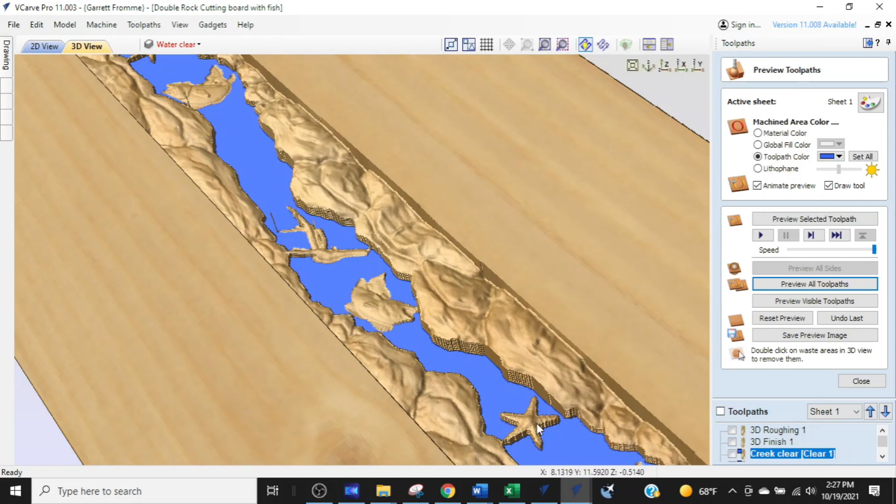You can see it is like a creek with fish in it. There's a couple of sticks, there's a starfish, and it's going through what looks like it's going to be the middle of a table. So he'll be doing a resin fill on this, I believe. It's kind of a cool project.

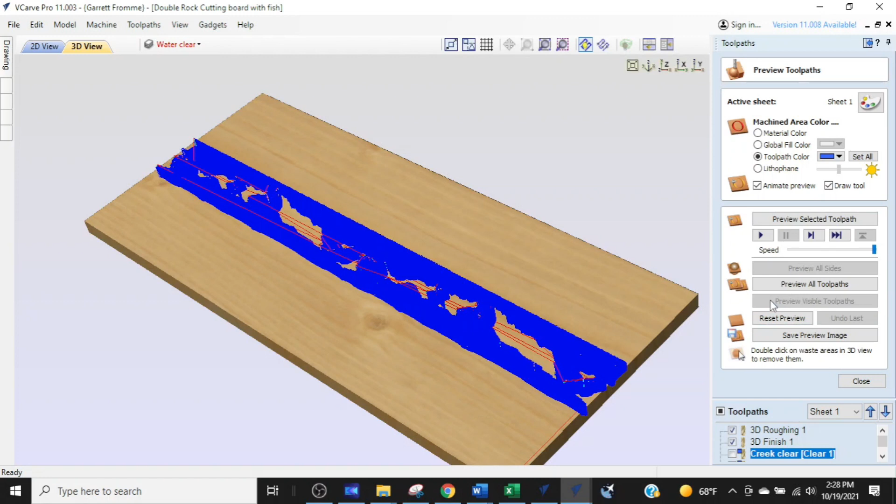But the problem that Mike is having is he doesn't know how to carve out this creek. Now I'll show you what I mean. I'm going to reset this preview and simply highlight the tool paths that Mike sees at this point, and this is what he has. So you can see that the creek itself is not carved out at this point, and he is wondering how to get to the point where he can carve out that creek.

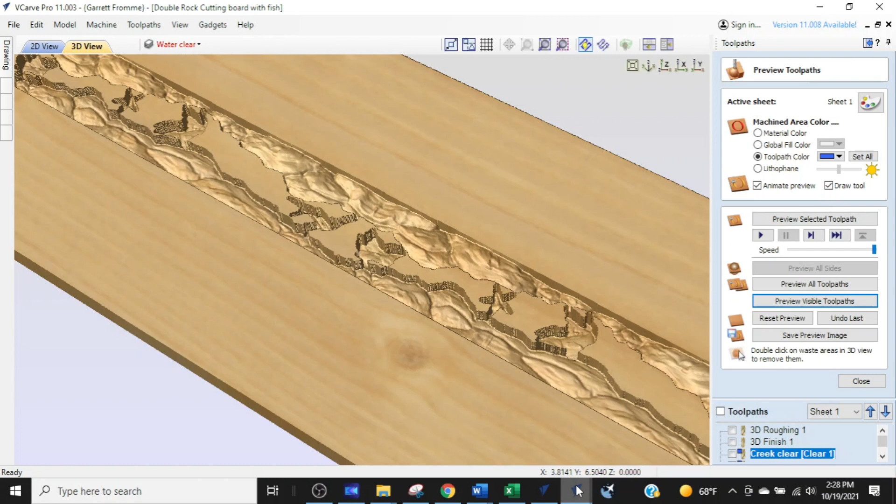So that's what we're going to work on, and I'm going to show you one technique to make this happen based on the project that Mike has, which is a fairly complex project to be working on. This is the beginning of the project here.

Now what he has done is he has placed several 3D models in this. So he has this creek bank there, a creek bank here. It looks like he's got 4 creek banks on each side. So this is kind of cool what he's got.

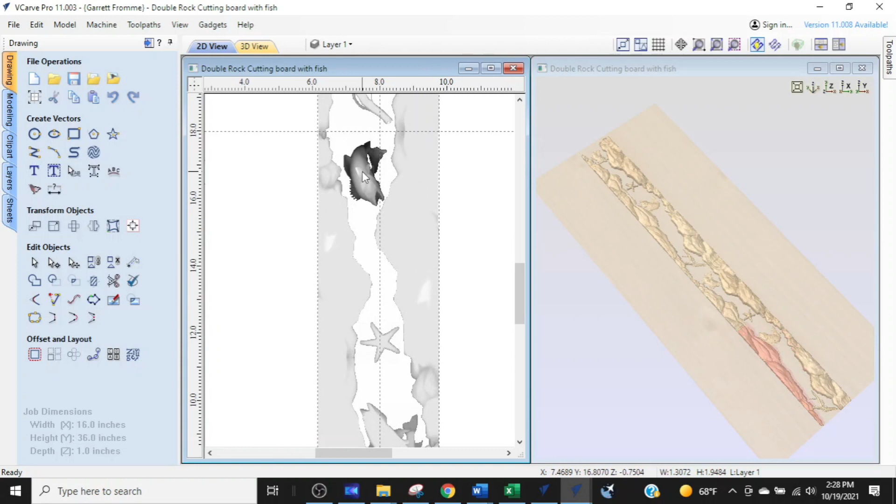And then he's got the 3D models of the fish inside and the starfish right there. You can see on our 3D screen what he has. I'll just switch over to the 3D real quick and zoom it up, and you can see he's got all those models in there. Let's just get that rotated right for you.

And so now he needs to get rid of the creek, and that's where he's struggling at. So we're going to walk through this whole process right here.

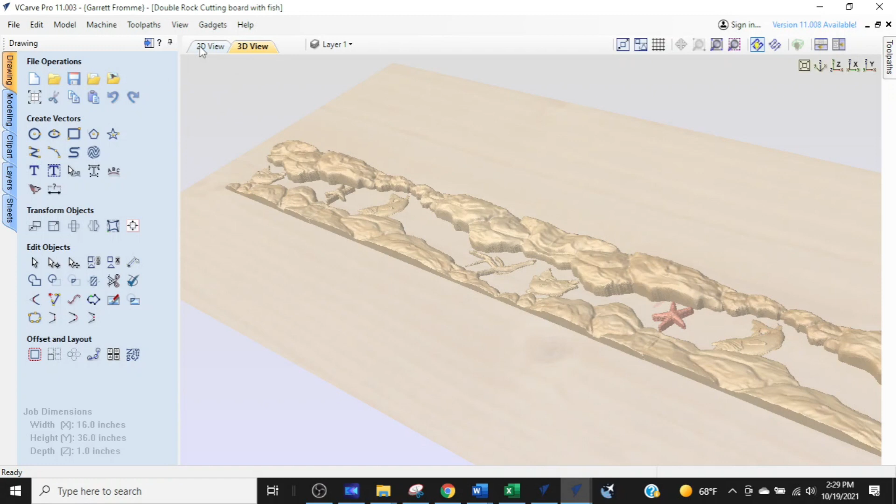So I'm going to switch over to the 2D view, and what we're looking at right now are some construction lines that Mike has created. If you don't know how these construction lines are created, it's very easy.

All you have to do is come up to the scale bar up on the top or on the side, and while you're there you simply just click your left mouse button and drag a line down, and now we've created one. So you can do a lot with this. I will do another video on these things.

So the first thing I want to do is create some layers to work with. Layers are like different sheets of paper, so I can work with individual items as desired. So we're going to create some layers.

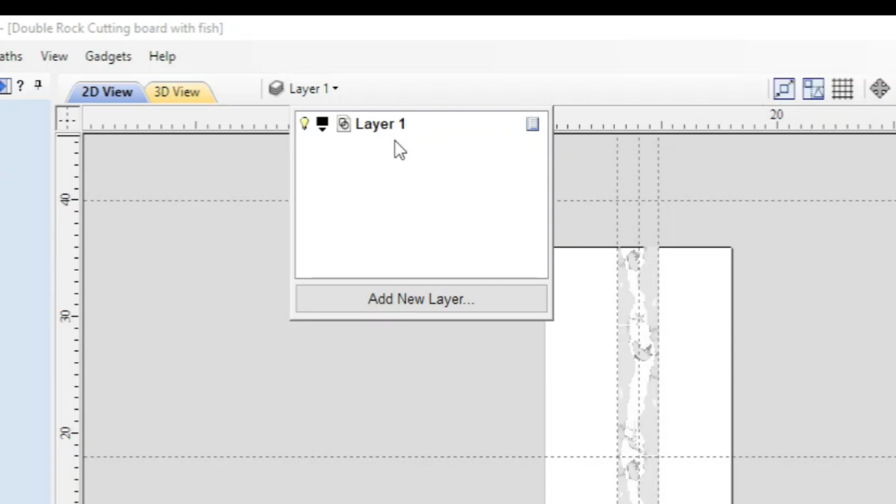So right here is the layers, and we're going to click that blue bar, and we have one layer. One of the things that we already know is that we have 3D components in this drawing, so I'm going to make a layer dedicated to those 3D components. I am going to select the word layer 1 by clicking on it once, and it turns blue so I can edit it, and I'm simply going to call it 3D components.

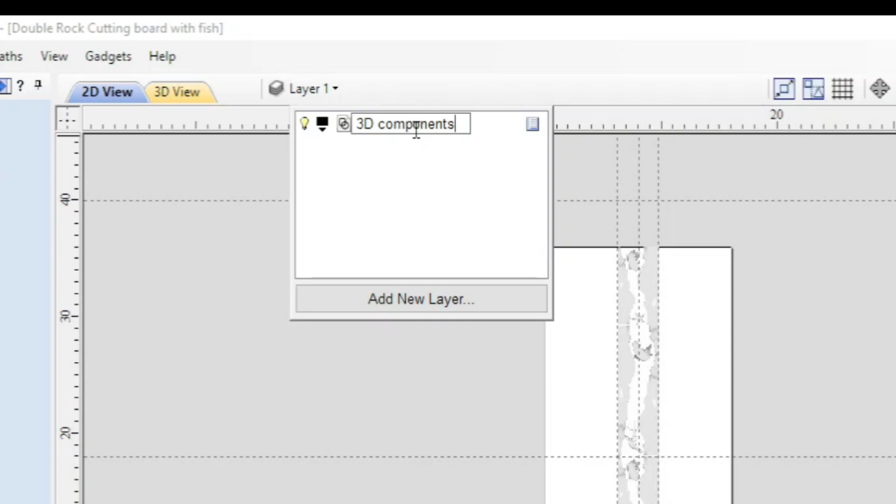And then I'll just click over in the white space. I'm going to click in the drop down box, and now we have named that 3D components, and you can see up here 3D components is listed.

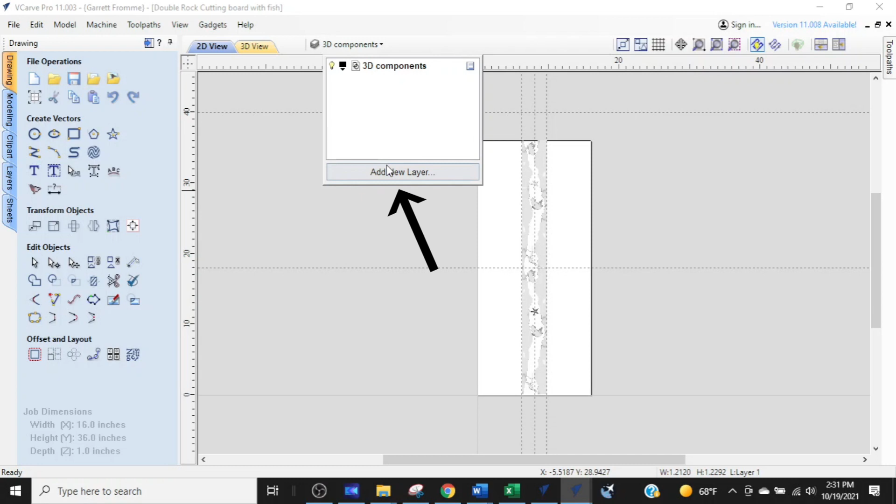So now we want to make boundaries around all these 3D components, and so we're going to create a layer to help us with that. What we do is come down and add new layer. Now you're going to understand why I'm doing this in just a little bit. But I'm going to click add new layer, and now you see there's another layer added here.

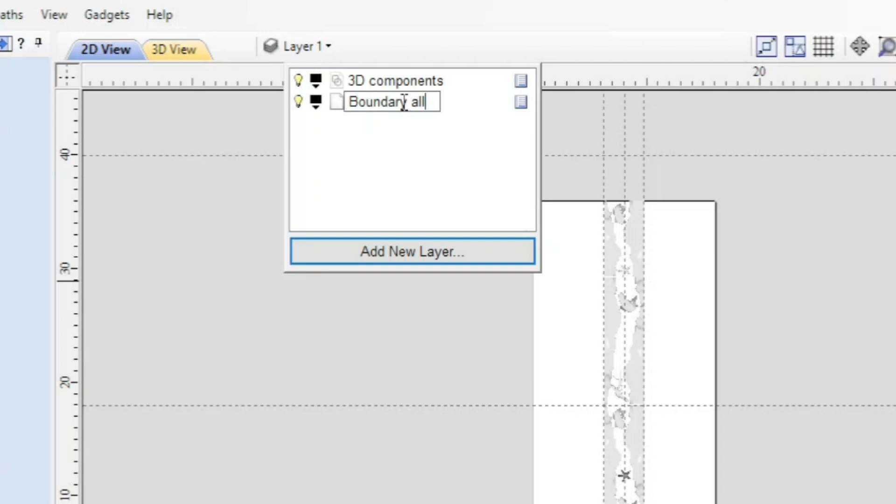So we're going to call this boundary. We're going to call it boundary, B-O-U-N-D-A-R-Y, all. And I'm just simply going to click right in here to engage that name, and now you can see it's there.

So now we want to identify the creek itself. So we're going to create a new layer for the creek, and we're going to add a new layer, click it, and now we have another layer, and we're going to call this Creek Clear, or we can call it Clearwater. That's a good name, Creek Clear.

Okay, I'm going to click right here, and we are going to click the black box right next to it, because I'm going to change the color of the lines that are going to be created. So I'm going to click that and click a color that I want. I'm going to click red, and we are good to go.

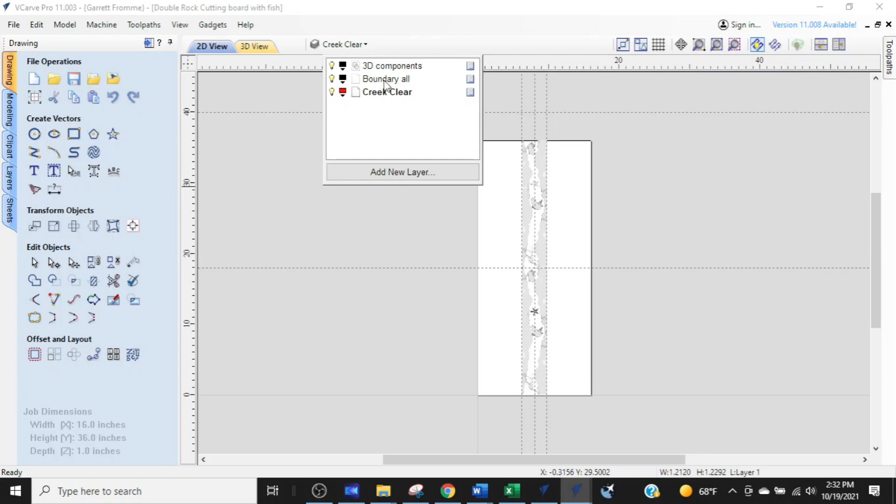So first of all, we want to get to the boundary layer, the boundary all layer, because we want to create a boundary around all our 3D models.

We are on boundary all. It says it right up here. So that's our confirmation that we were on that layer.

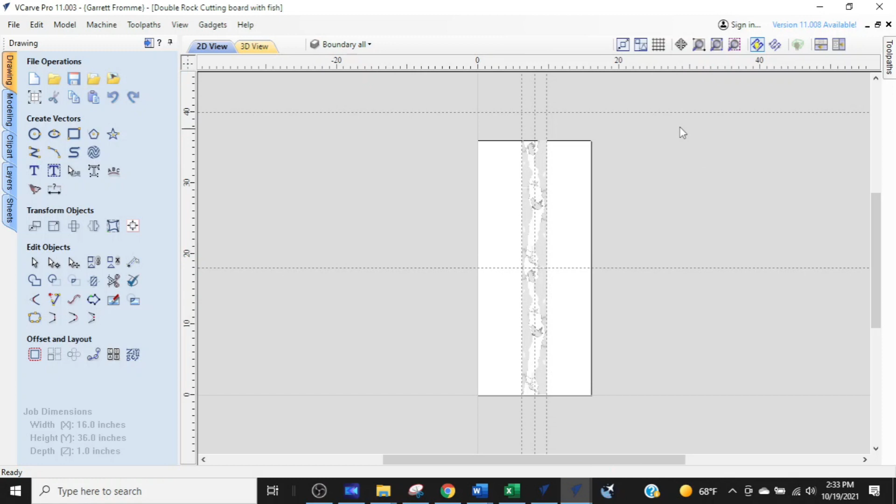And so now what we're going to do is come over to any corner above and away from our project. We're just going to go from the upper left to the lower right, and we're going to create a box that's going to encompass the entire 3D model, just like that. And you can see everything in the 3D model is now highlighted. Okay, so now we're going to create a boundary around that model.

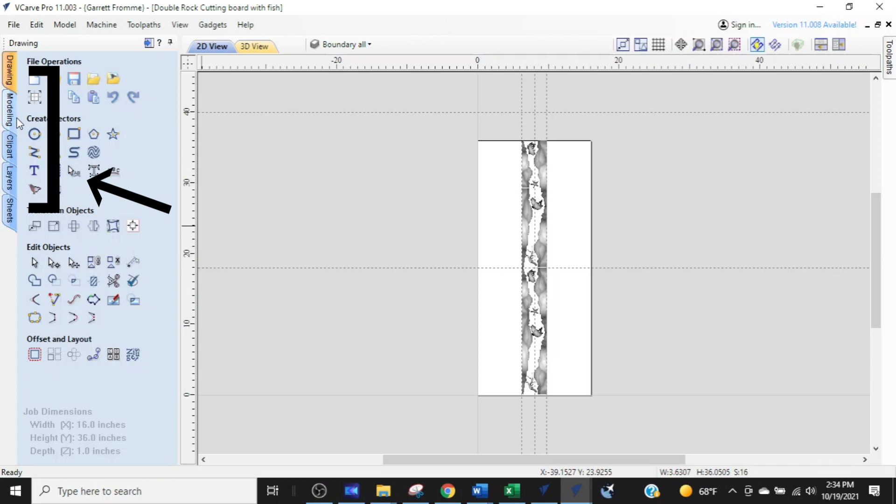Now if you have less than version 11 in the Vectric software, you're going to have some blue tabs down at the bottom on the left side. If you have version 11, the tabs are over here on the left and the upper side along the side panel. What you want to do is go to those tabs, and we're going to go to the modeling tab.

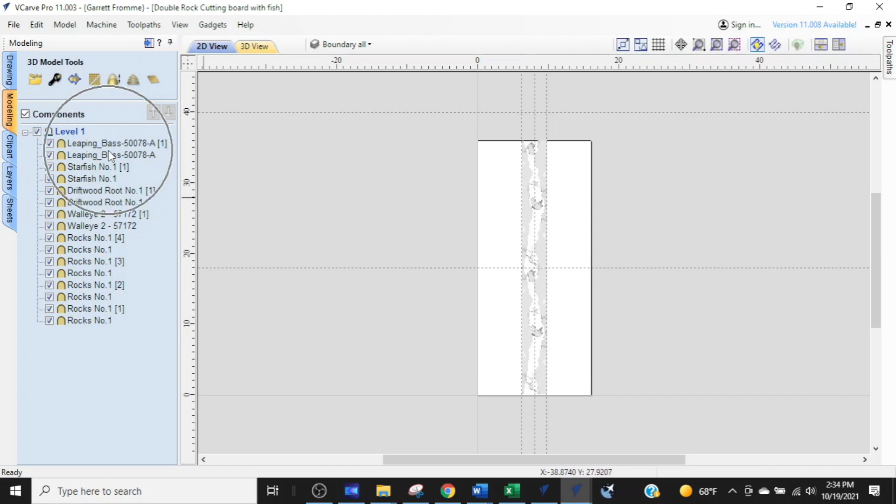We're going to select that, and the first thing is you're going to see all these items in your list, and we want to make sure that they are all highlighted a dark blue. When we created that window around it and selected everything, that's what we have. We got the highlighted dark blue. I'll show you. I'm just simply going to click right here, and it unhighlighted those, and you can see they're no longer highlighted. So we're going to create that window around everything again and grab it, and now everything's dark blue.

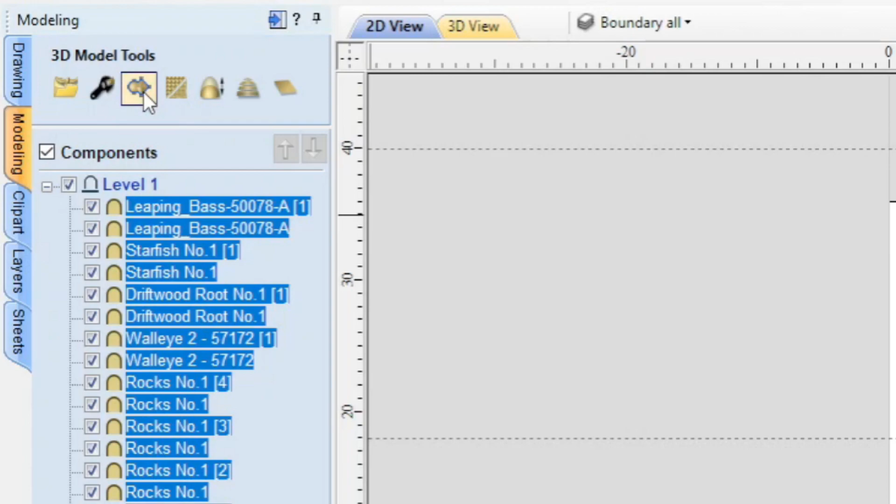So what you want to do is find an icon that says create vector boundary around selected components, and so this is the icon that we're going to use. And all we have to do is click it once, and we're done. So now we just click out here in the field, and I'm going to show you what that just did.

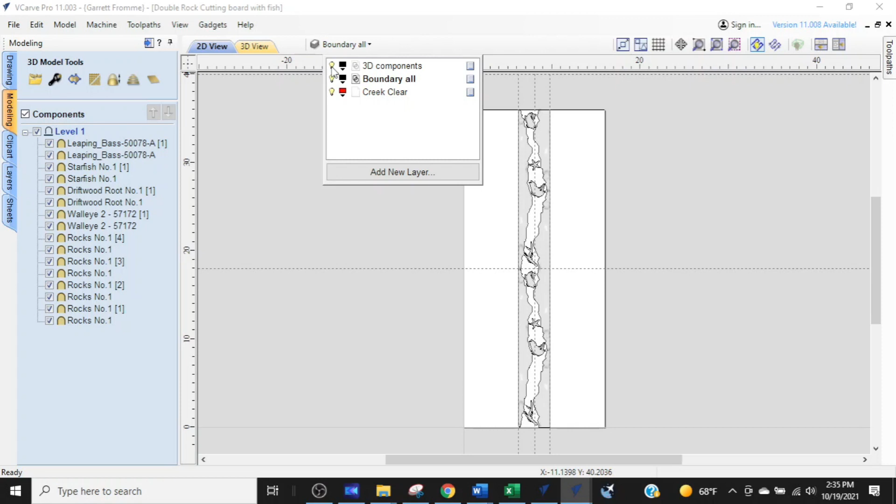We'll go up to the layers section right here in the blue box, click it, and we're going to hit the little light bulb next to 3D components. And what that's going to do is make the 3D components all invisible. So I click that, and now you see we have some lines here. That's what we just created by clicking that button, create vector boundary around selected objects.

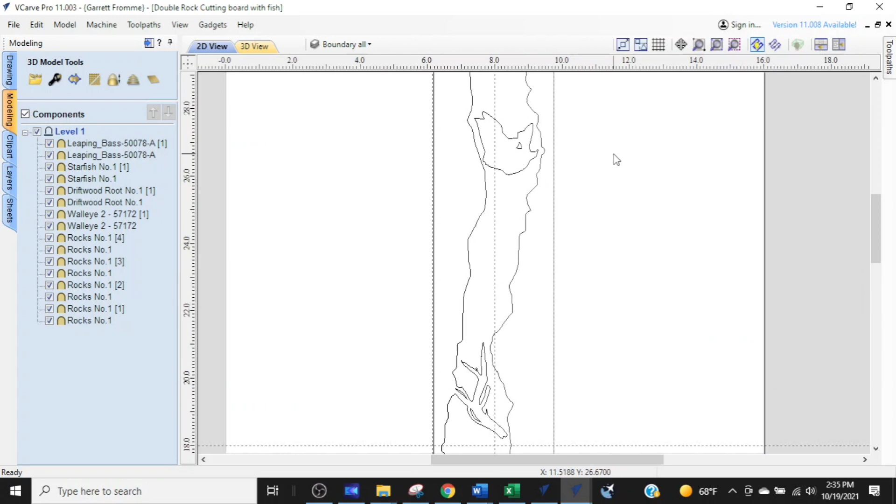All the items are selected, and by clicking that button, we created boundaries around all the 3D models that were there. So you can see there's the fish and the starfish and the sticks and the bank of the creek.

So we are good to go so far, but now, well, we don't need to use this boundary in order to carve this 3D model, but we're going to take advantage of the boundary we just created so we can carve out the creek. We want to get rid of all the material inside the creek here, but we don't want to touch the fish or the stick or the starfish. So what we're going to do is change layers now and create some new vectors on a new layer that's going to outline the creek itself.

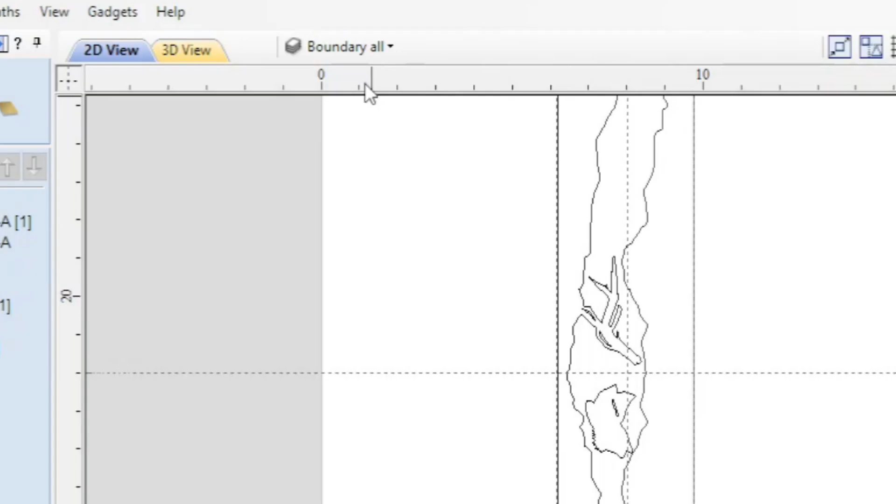So we come up to layers, click it again, and we're going to come down and select creek clear. You select that and you see it says creek clear up here. And that means we're on the layer that we want to be on. So now we're going to just click out in the white space to get rid of this menu box. So you click there and that menu box goes away.

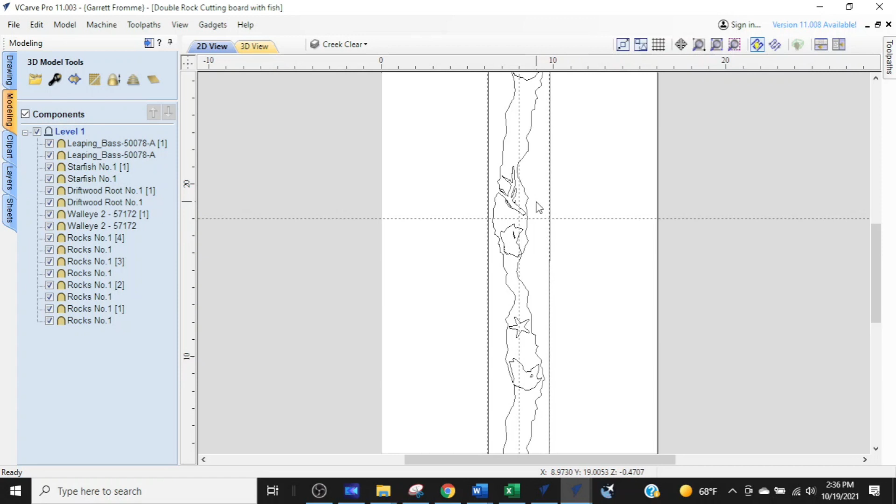And what we're going to do is we're going to copy all these vectors over to this new layer. Right now they are on boundary all layer. If I go and turn the little light bulb off on boundary all, they go away. So that's my confirmation that it's on that layer. But we have nothing on creek clear layer. So we're going to copy everything over to creek clear layer.

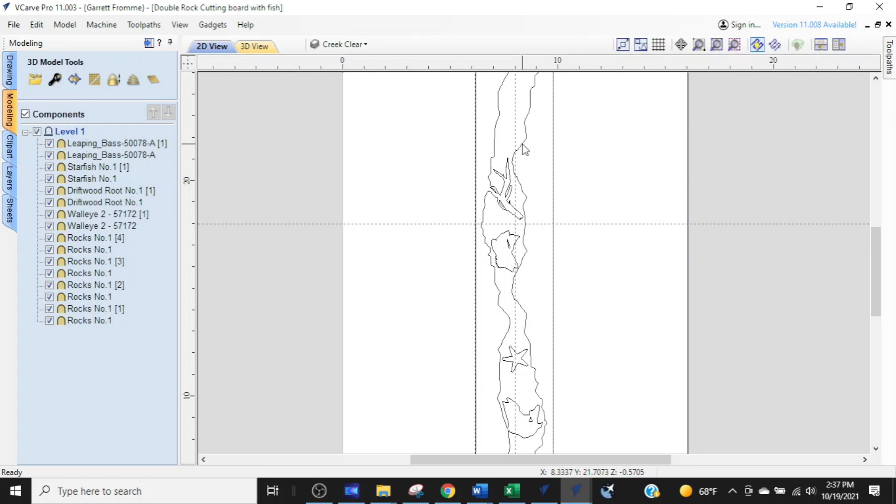So we're going to click one of these vectors and you notice everything turned solid purple. That means that all the vectors that we created are grouped. If it came out as dashed, then they are not grouped and you would have to select every item in there in order to do this copy. But it's a good thing that it's grouped. We want that. It makes it much easier.

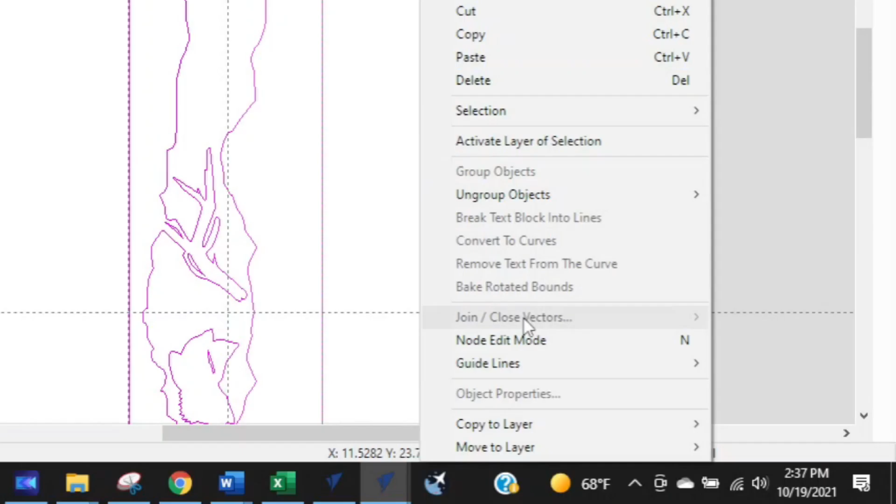And so while everything is selected pink or purple, anywhere on the screen, we're going to right click and we're going to get a menu up. And we're going to come down to the bottom and go to copy to layer. And we're going to click creek clear. And what that's going to do is copy everything that's selected over to creek clear. It will not remove it from the original layer it's on. It's just simply going to copy it.

So I click that. And so now you can see all the lines turned red. If you remember, we turned creek clear red color right here. So that means we now have it on there. But the thing is, it's still on the boundary layer as black. The creek clear copy is sitting on top of the black line. So we don't want to mess with that right now.

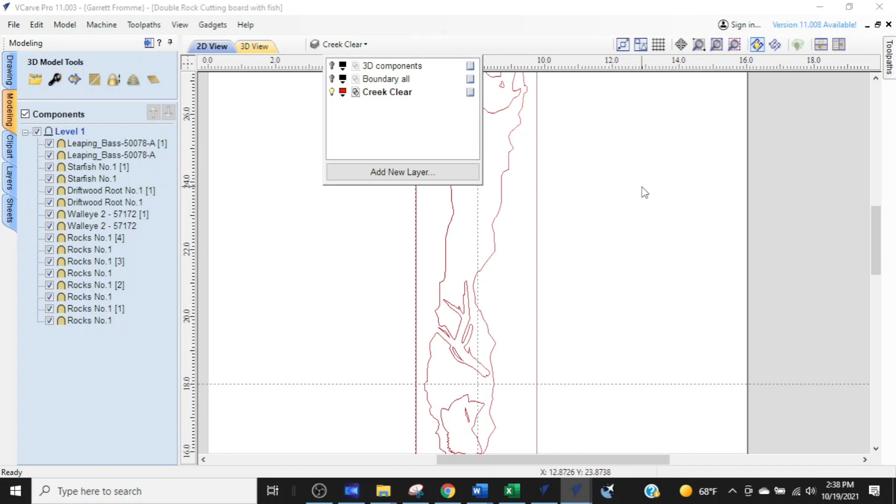So what we're going to do is come over and just click the little light bulb next to boundary all. We're going to turn that off. We want it out of our way and we don't want to fiddle with it. And so now we're simply going to click out here into space to close this menu, and at the same time it'll deselect anything that might have been selected, which is what we want. So now we are on the creek clear layer, and that's the only layer turned on.

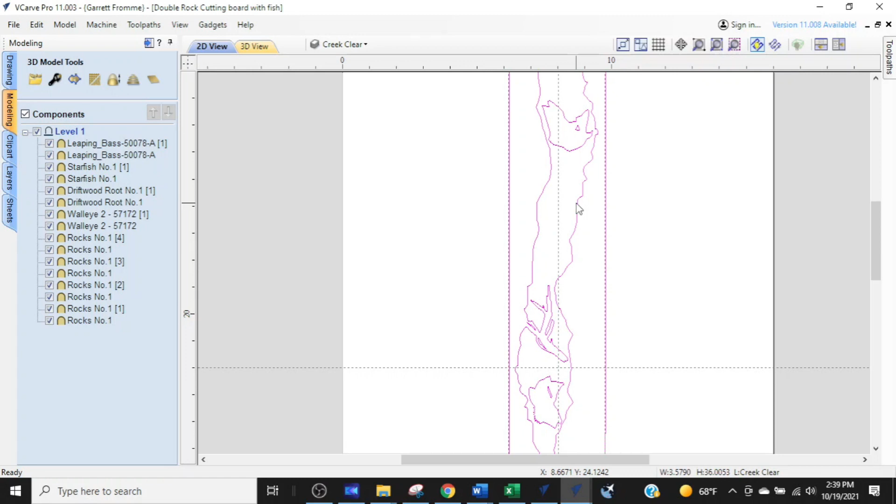And now we need to ungroup all these vectors because now we have to isolate the creek. So we're going to select that vector, and again, everything's grouped because it came in solid purple. I'm going to ungroup it. With everything selected, I can go anywhere on the screen, right click again, and you'll see down in the middle of the menu it says ungroup objects. So when you hover over that, a new menu appears next to it. One says ungroup back onto original object layers, and the other one says ungroup onto groups layer.

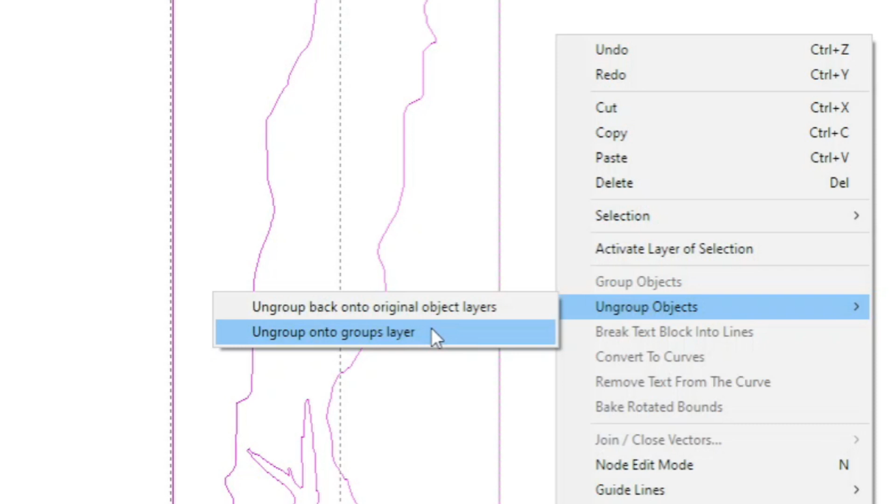If you select this button here, the first one, it's going to ungroup it, but it's going to copy it back over to the first layer that we were working with, which was boundary all. So you want to select the second one, ungroup onto groups layer. Now I don't know why they say onto groups layer. It doesn't make sense to me, but that's what we want. And we click it and you can see everything is now dashed. That means it's all ungrouped.

And that means if I select an item like the fish, only the fish is going to be highlighted, or the creek, a part of the creek will be highlighted. But that's exactly what we wanted. So now we are going to isolate this creek. So we're going to come up to the top of the creek right here. And I'm simply going to click right here for right now because I want to deselect this part of the creek. So I click there.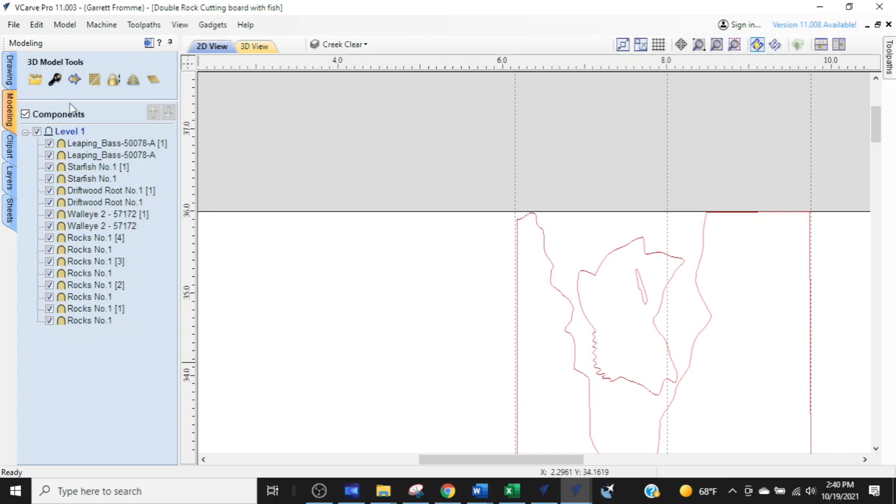We're going to go back over to these little blue tabs we have over in the drawing area. Remember, if you have less than version 10 in the Vectric software, your tabs will be down here. If you have version 11, they will be up here along the left side. And we're going to go to the drawing tab. Click that. Now you want to make sure that your snap buttons are turned on. That's this button and this button. They're turned on when they have a little box around them. I'll show you what I mean.

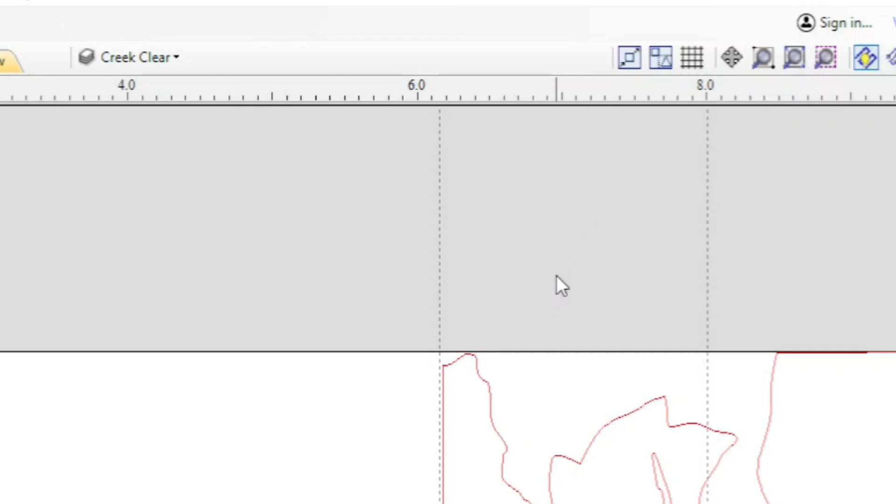I'm going to click that one snap button and you see that box around it went away. So we want it turned on. And the reason is because we're going to draw some lines and we want the lines to grab to the lines that we are going to be selecting. You'll see what I mean in a minute.

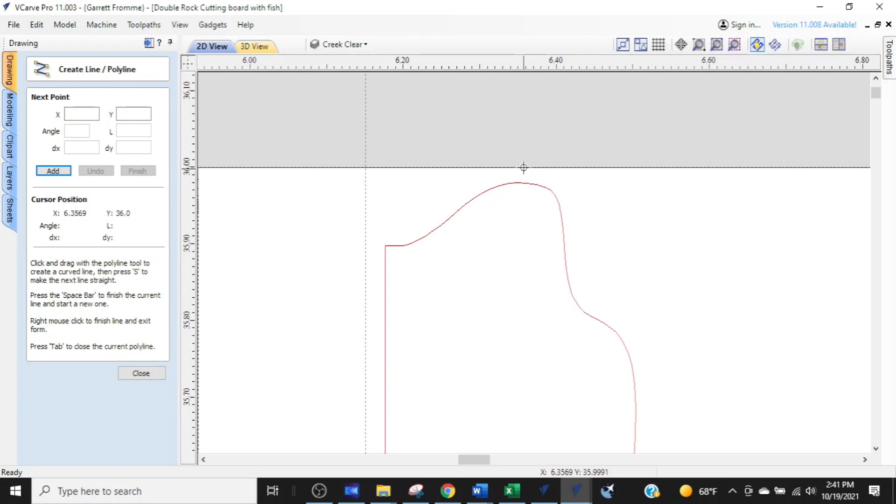So what we're going to do is grab a straight line right here, the polyline, and select that. And we're going to zoom in to the end of the creek. Now, Mike, just so you know, your creek is not going all the way to the end of the table. I don't think it's going to make a difference here, but you just may want to pay attention to that and maybe stretch this out a little bit. I'll show you how to do that real quick.

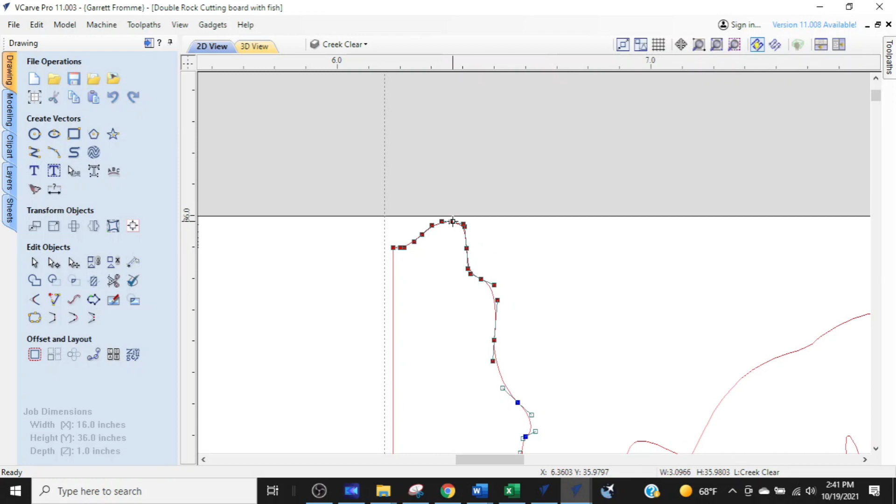We're going to select that. And so we just have that part of the creek, and we're going to hit N for node, and I'm going to create a window right there. We'll come all the way around those nodes there. And while that's selected, we're just going to grab one of these nodes and just stretch it upwards. And now we have crossed over. So that's one way you can fix that.

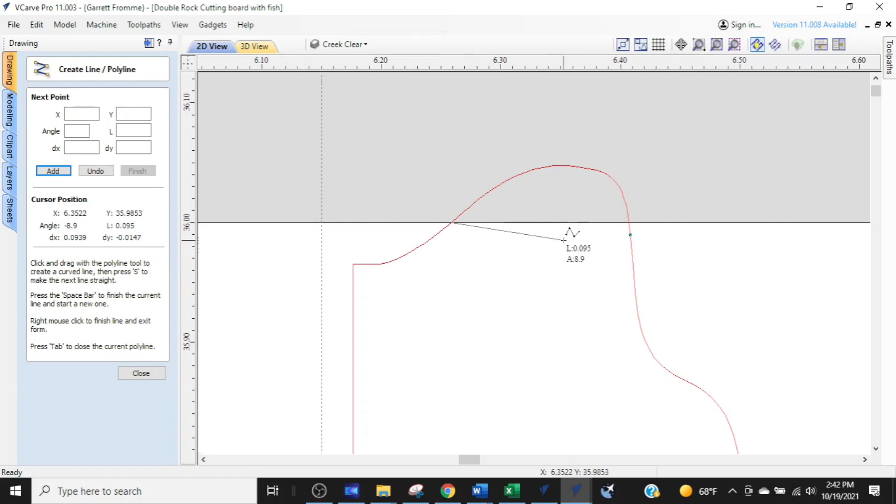And then we would go back to our line. Hit the escape button to get out of node mode. We're going to come back to our line, and we're going to just create a line from this intersection point right there. And the snaps are turned on, so we can do exactly what we did. You see the line snapped right to the intersection of the end of the project and where this curved line crosses over. And we're simply going to come over and we're going to find this corner right there.

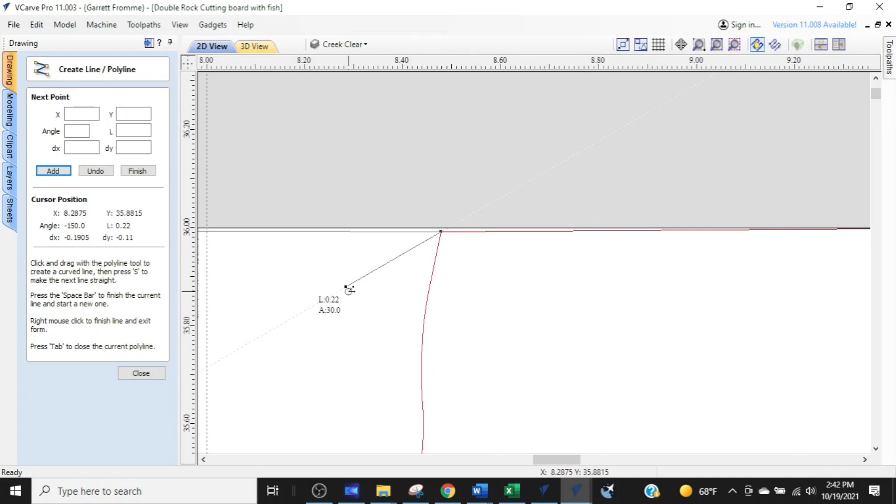Now, again, you want to fix this part as well, Mike, but I'm not going to do that in this. I just want to show you how to get to carving out in the middle of 3D projects. So I click that, and now we have that line going all the way across. Now you see I still have a line going, and I don't want to continue to draw that line. So I'm going to hit the space bar, and what that's going to do is terminate that line, but I am still in line mode. You can tell by my cursor it has a zigzag on it. That means we are in drawing straight lines. So we can start a new line.

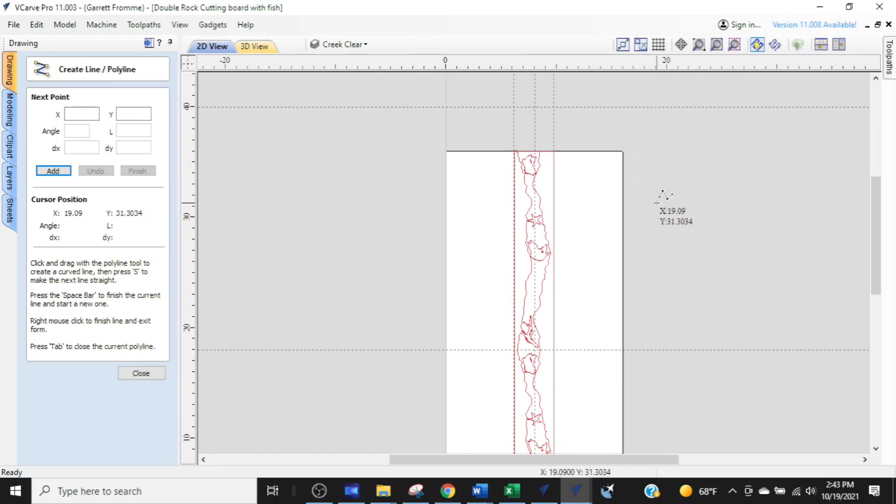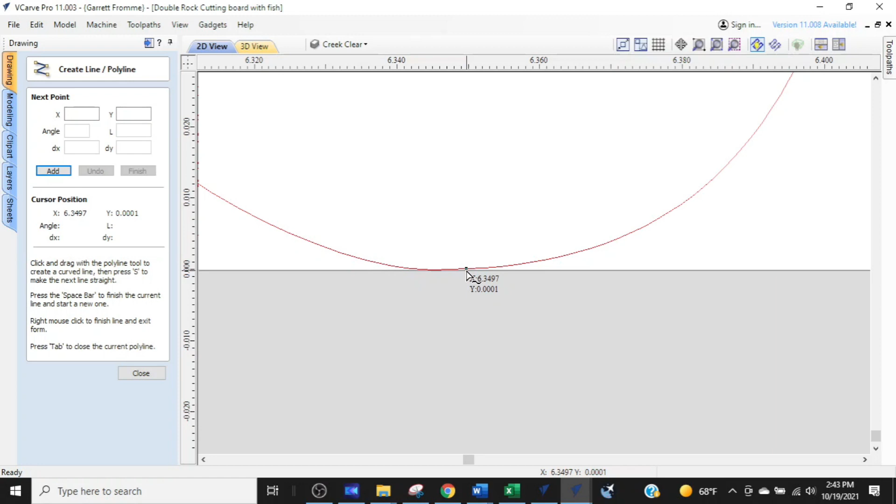So we're going to go to the other end of this drawing and do the same thing. We're going to find a point that's at the bottom and to the right just a little bit. And the reason I'm doing this is because I don't want my line to cross over a very thin area right there. It's going to cause some issue when we're trying to carve things out. So we're going to select a little bit over and to the right, and I grab that, and we're going to come over to the other side. We've got that little corner there, and we're going to let it snap right there. And then we're going to hit space. We're good. I'm going to hit escape to get out of line mode.

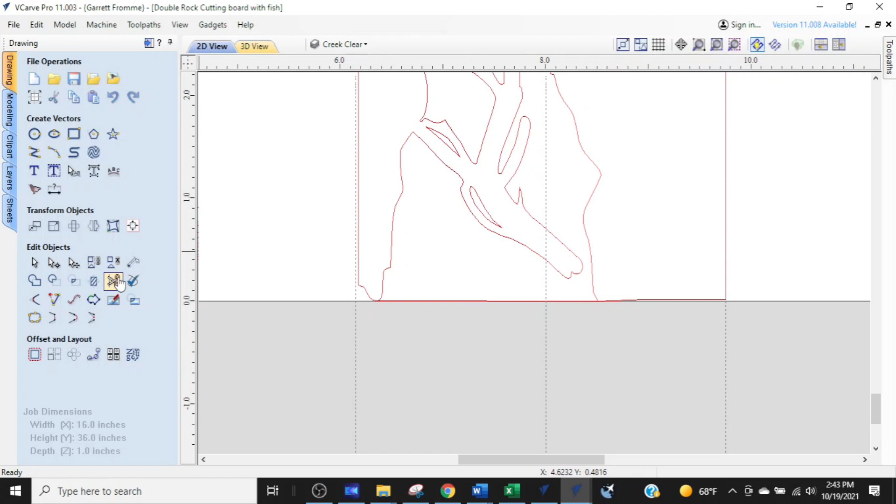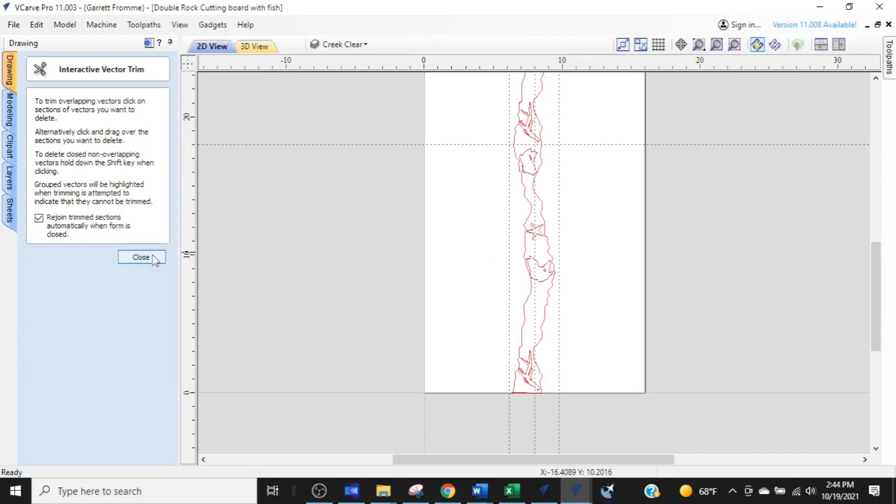So I'm going to close the cutting. I'm going to switch over to the tool path, and we're just going to take a look at what we've got right now. So this little button here, it says preview tool paths. I'm going to select it, and I'm going to simply preview all tool paths to see what we have so far. And so you remember we have all the carves.

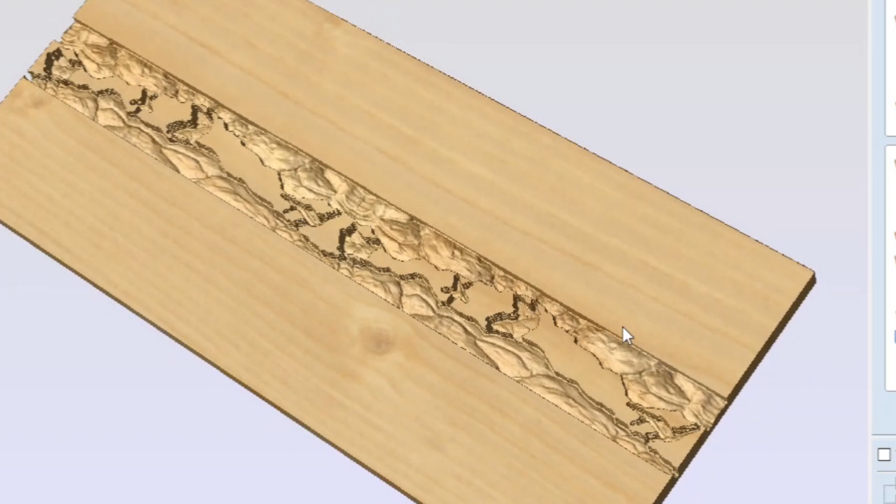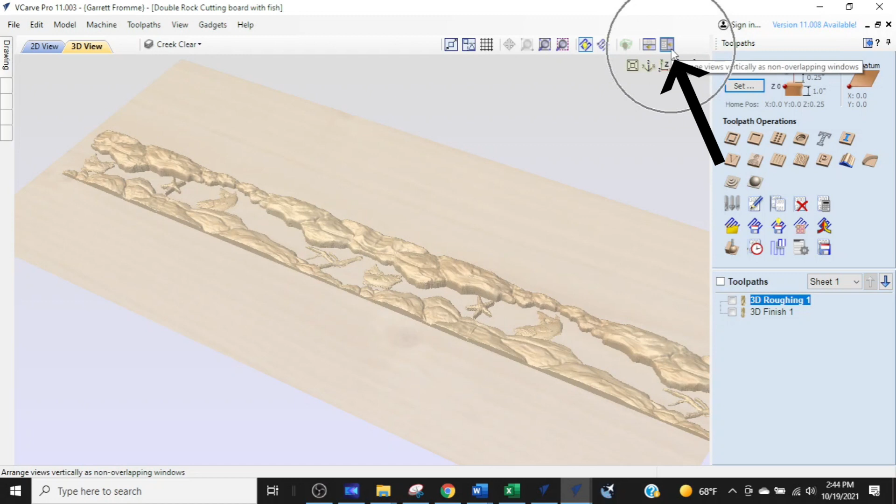We have the starfish buried down in the wood. We have a fish buried down in the wood. We have the banks buried in the wood, but the creek is up way high. So this is exactly what we're going to fix right now. So I'm going to close this preview toolpaths menu, and we're going to split our screen by hitting this little button right up here in the upper rightish area. It's that little square split in the middle button.

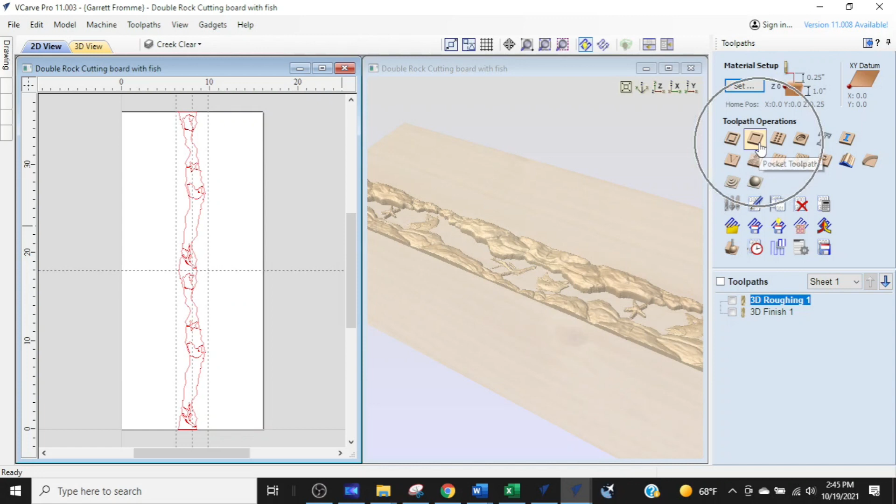Click that. And so what we want to do is pocket out everything around in the water. So we just simply are taking the water level down to where it should be. So we are going to click the pocketing toolpath right here, and that will clear out material inside of boundaries that we create, which is what we've created over here in the 2D area. We've created creek boundaries. So I select that button, and I think this project is an inch thick.

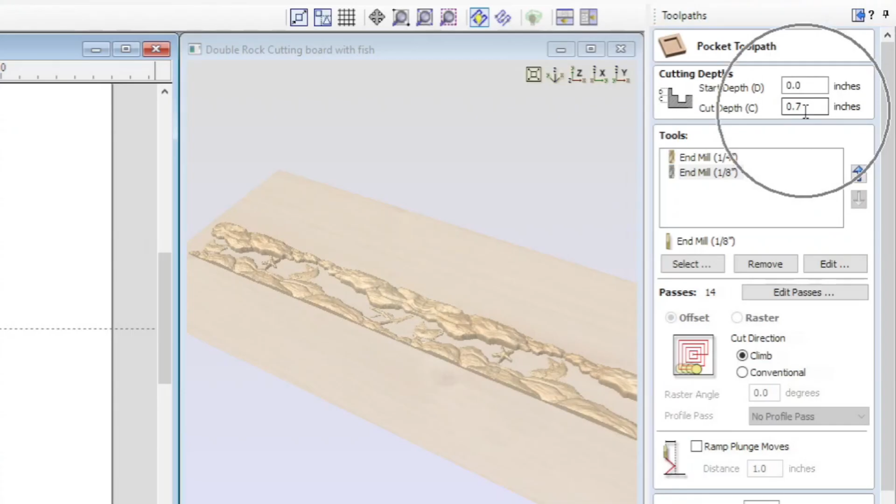So what we're going to do, first of all, we click the pocketing, and then we have to select our boundaries. So we're going to select everything in the 2D view. So it's all highlighted pink, and that's what we have. And then we are going to select the depth of cut. So I was practicing a little bit on this before and found that depth of cut is about 0.7 to get the water level down to where it's going to go. So I've set it up at 0.7,

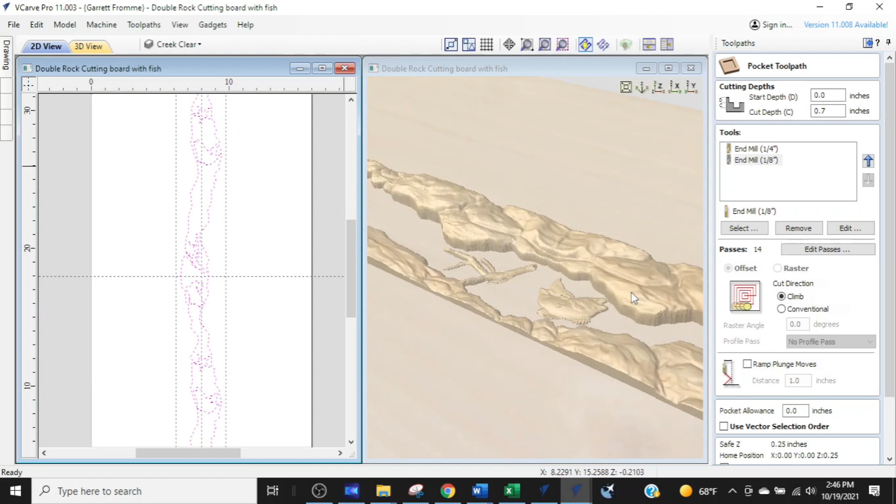and then we need to select the clearance bits that we're going to be using. I know that this has got some pretty funny tight shapes in here. We need to get into the corners right up in here, and a 1/4 inch end mill will not get in there. So we have to use a smaller bit, but we also want to use a big bit in order to get as much of this taken out as fast as possible. So we're selecting 2 bits. Where it says tools, we have the 1/4 inch end mill and the 1/8 inch end mill.

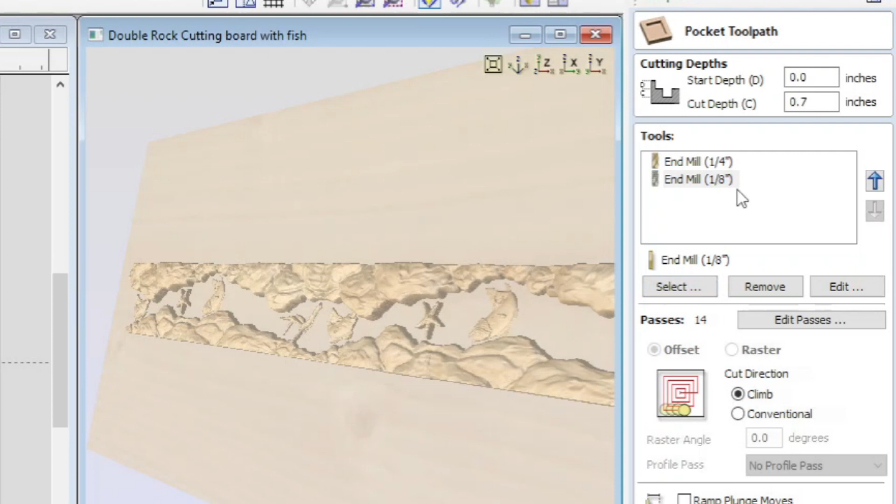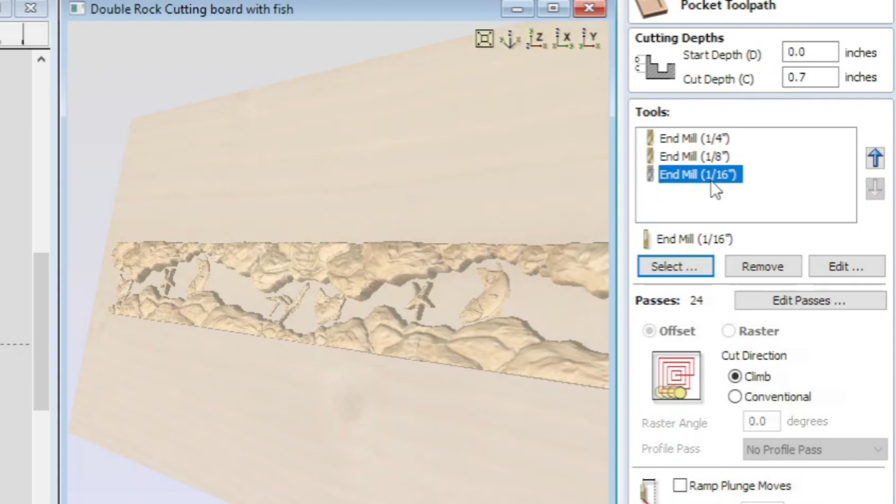Now if you need to select those bits, all you do is keep selecting bits. So I'll show you. We'll just pick a 1/16 real quick. I'm going to hit select, and I'm just going to select the 1/16 inch end mill, and there you can see it's been added to this list. So if you need to get some finer cleanup going on, then that's the way you do it. And if your bits are out of order, then you use the arrow buttons over here to get them in order. You should always want this to go from biggest to smallest. So I'm going to select that and click the remove button because I don't want it. And then we are going to just see.

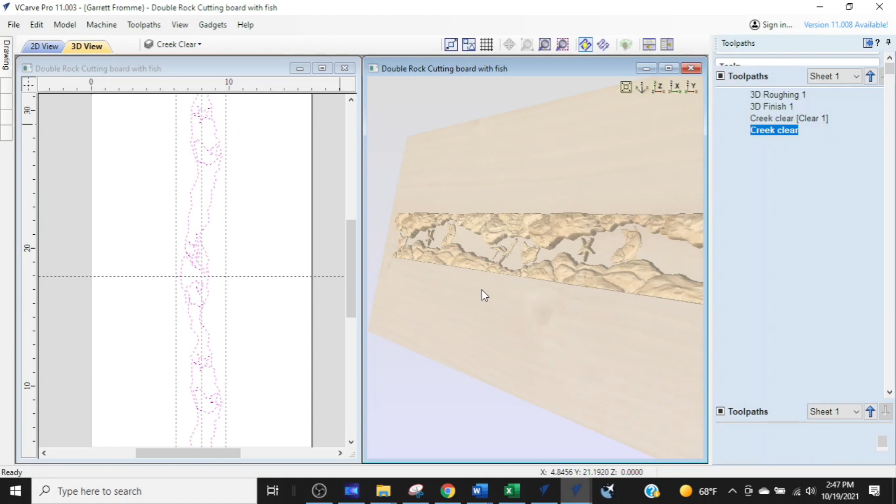Okay, so I am set on offset. I'm not going to discuss that here because I've talked about that in other videos. This is just to show you the creek thing. We're going to name our tool path. We're going to call it Creek Clear. And we're going to calculate. So I have to go to Vector Validator. And I'm going to continue anyway because I want to see what it's creating. Vector Validator means that we have an issue in there, and it's going to ignore some things if it has to. But it looks like we're in pretty good shape.

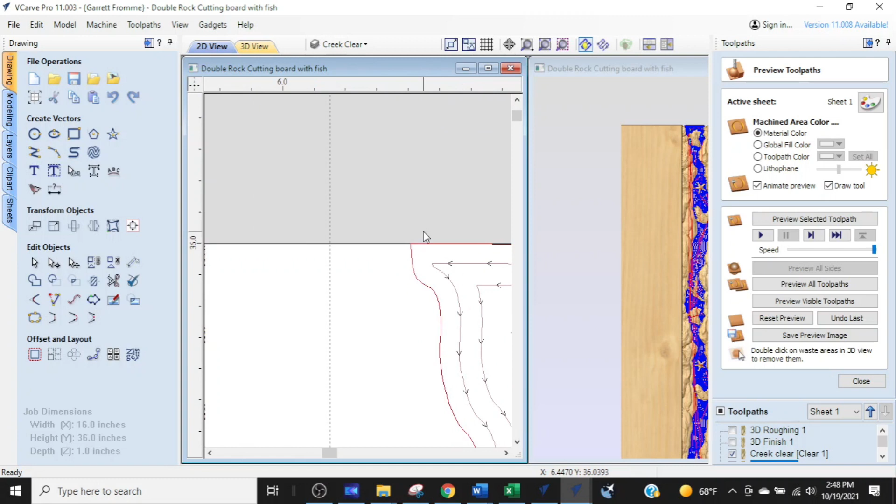So with Vector Validator, I know exactly what went wrong. Okay. It would be right here. I've got this little weird spot right there. So what we're going to do is simply fix that real quick. You know we got this little pull-out tab that brings out the menu. So this is for quick fixes. I'm going to grab the scissors. I'm going to come in and I'm simply going to cut that away and close that. And then we are going to go back into that tool path.

Creek Clear. Either one, there's 2 of them because we've got the 1/4 inch bit right there and the 1/8 inch bit right there, but you can click either one, it'll take you into the same tool path. And I just want to make sure that creek is still selected, which it's not now because we modified that line. So hold your shift button down and select the creek outline. And there it is. I'm going to recalculate this, and we will not get that warning this time.

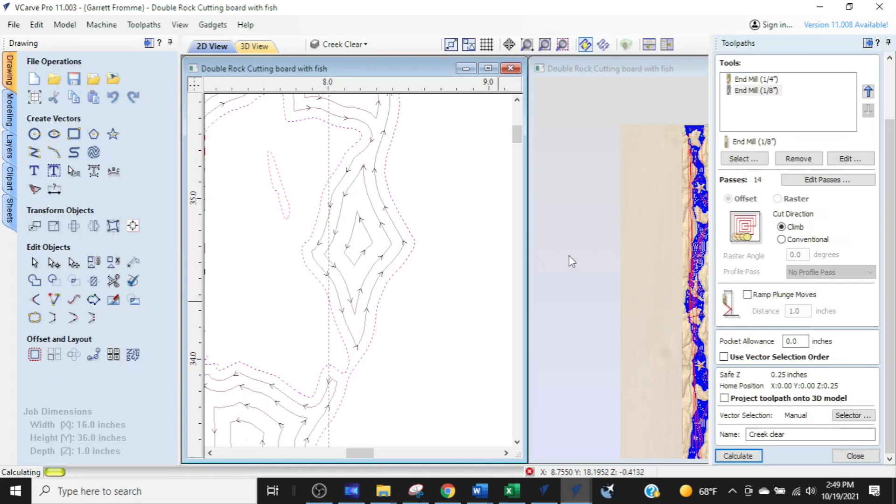And we are good to go. Now see how the menu is still hanging out up here? I don't want that, so I'm going to click the blue button to get rid of it, and we are going to reset that tool path, and now everything is good to go. Now we're going to preview all tool paths, but let's get this big first so we can see it all.

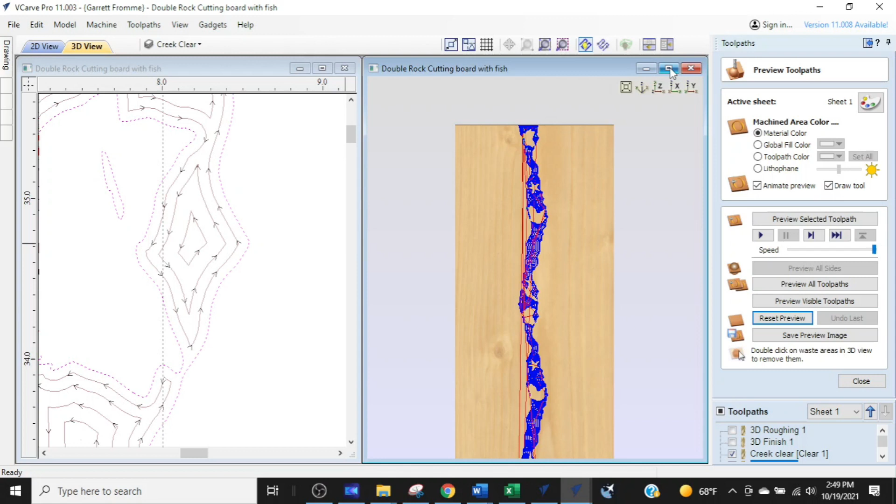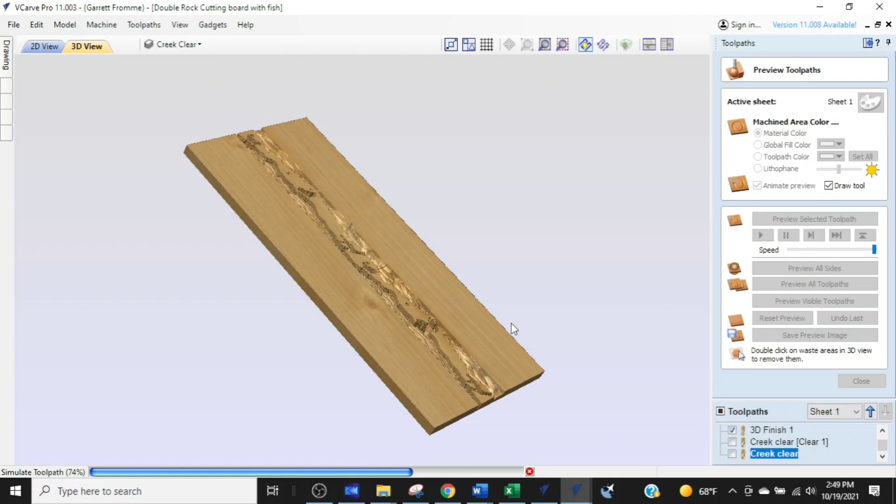When we reset the tool path, it takes away all the carve that we would have had there. I'll show you what I mean. I'm just going to clear this out real quick. You see, it just takes us back to that board. Now I'm going to preview all tool paths. That's going to run all the tool paths we have created there. So I select that, and you can see the bit is now starting to run out. And now we have cleared out the creek.

Now you see our banks are a little bit high here, right in this area. So you might have to modify and do a little tilting on the 3D models. I can talk about that in another video, or you can go to Mike Mazelik's channel. He does a lot of advanced 3D modeling stuff. Very, very, very good with the Vectric Aspire. So we're looking good there.

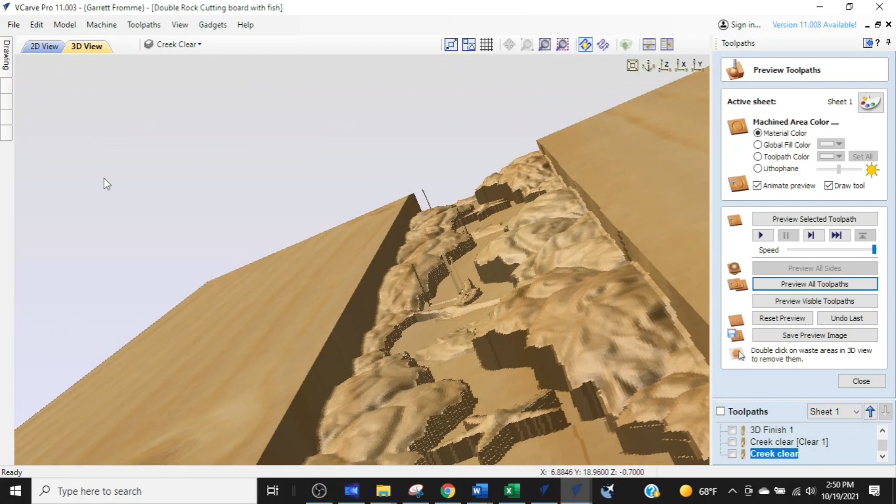You can see I've got a couple of pieces sticking up here. That's because I would need a finer bit, like a 16th, to get into there. But 16ths aren't long enough to get into this depth. So we could possibly make this creek a little bit shallower, but if we do, we will start to come up high on the fishes and what have you. So my resolution is set a little low on this, I think.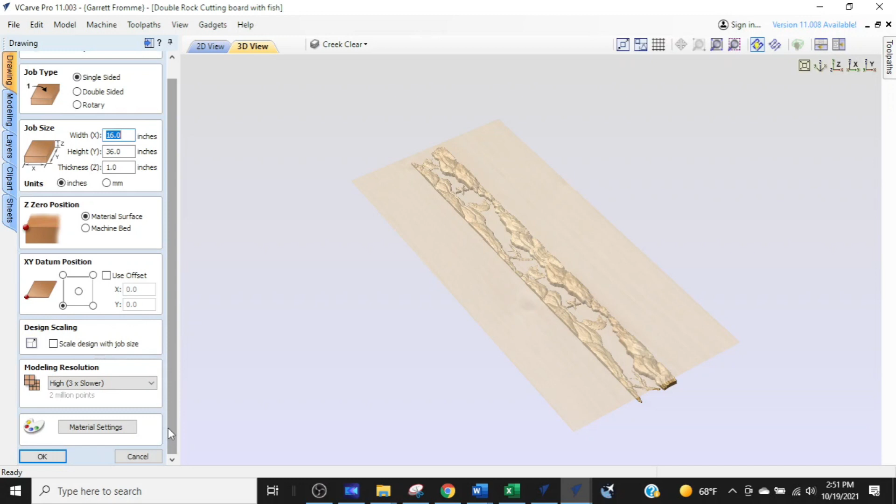I'm going to close this, and I'm going to switch back over to here, and I'm going to go to Job Setup right there, because I want to see what my resolution is set up on. So we've got the resolution set on high. In this case, we'd probably want to go very high. So I'm going to change it. I'm going to select OK. Let the computer do its stuff. I'm going to switch back over to Toolpath. I'm going to recalculate everything by clicking the little calculator button there.

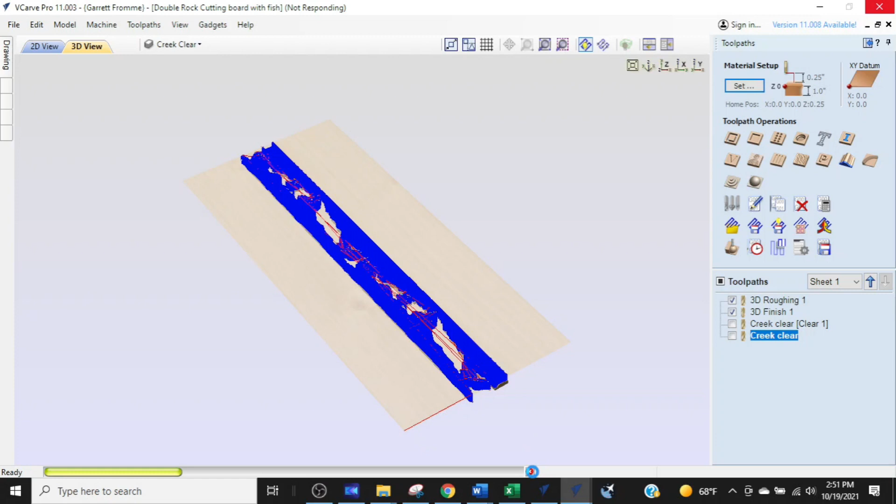Now my computer resolution won't make this show up really good, but you can see now it's taking a little longer to calculate this thing out. Let's see. There we go. Okay. So it's just taking a little bit longer because I'm using a lot higher resolution. And let's see what she looks like. We're going to reset the preview, and we're going to run all toolpaths. And I mean, it doesn't make stuff look a lot better. It's just the resolution of my computer.

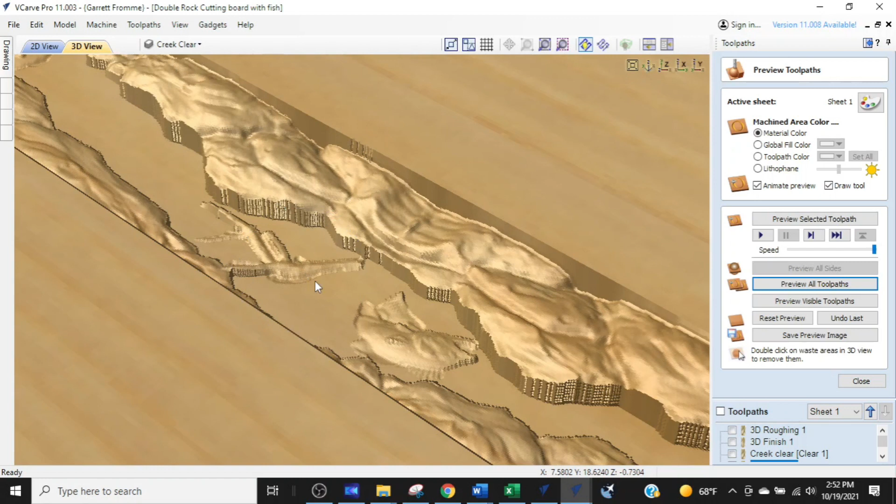It's looking like you might need to raise the base height up on your fishes and things like that, Mike, a little bit. I've got other videos. I'll put links down for the rooster video that I think talks about it. I have another video that will talk about it as well. So the links will be down below to teach you more about the 3D models and how to work with them. Okay, so let's just kind of doctor this up so you see exactly what we have completed.

I'm going to go to Toolpath Color.

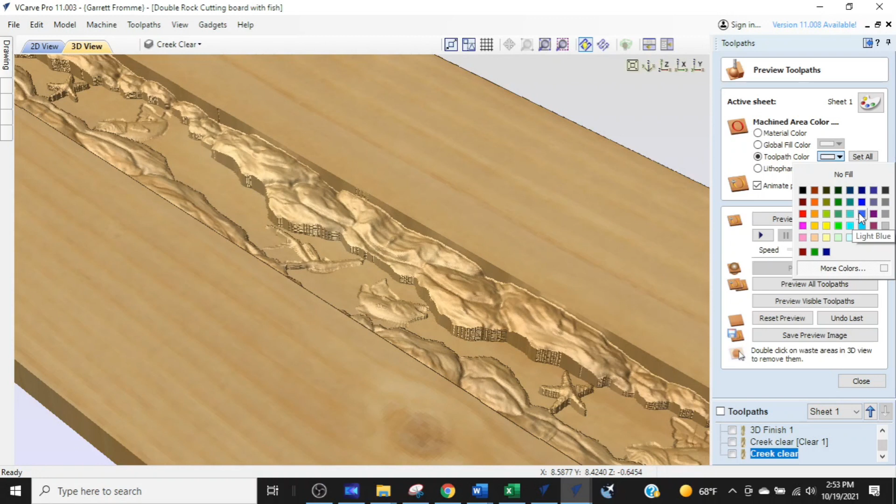Okay, so let's change the color. We're going to turn the creek into a blue creek. So I'm going to select Toolpath Color. And I want to make sure down in the toolpath area that one of the creek things is selected. So we have creek clear selected in the bottom. We're going to select a nice bluish color, a nice light, pretty blue. We'll take that one right there. Now you see I gained some color in my toolpath.

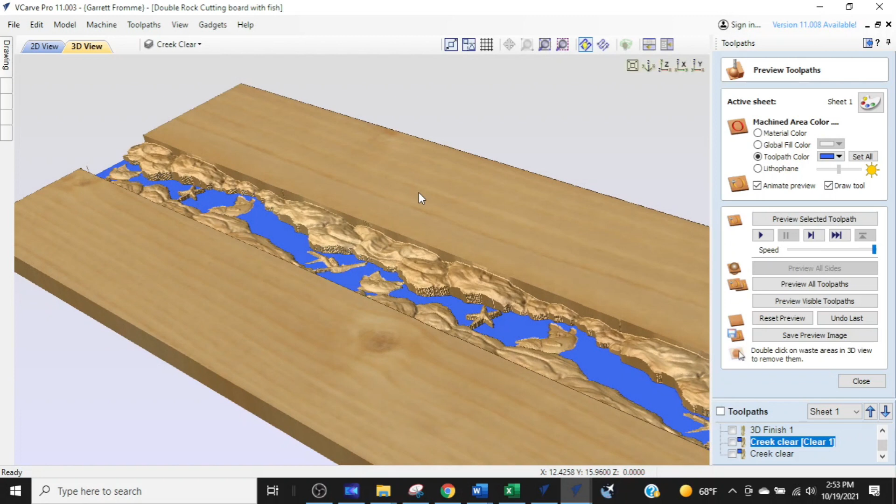Now that's the finishing tool, the finishing bit. That's the 1/8 bit. We still have to change the 1/4 inch bit. So I got to come over here and select that 1/4 inch path, and come up here and change the color for that as well. So I'm going to select the same blue, and look at that. We got a beautiful creek running through this thing. So that's what Mike is going to be doing when he's done with this. You still got a bit of work to do on this, Mike. You're really going to some advanced stuff here.

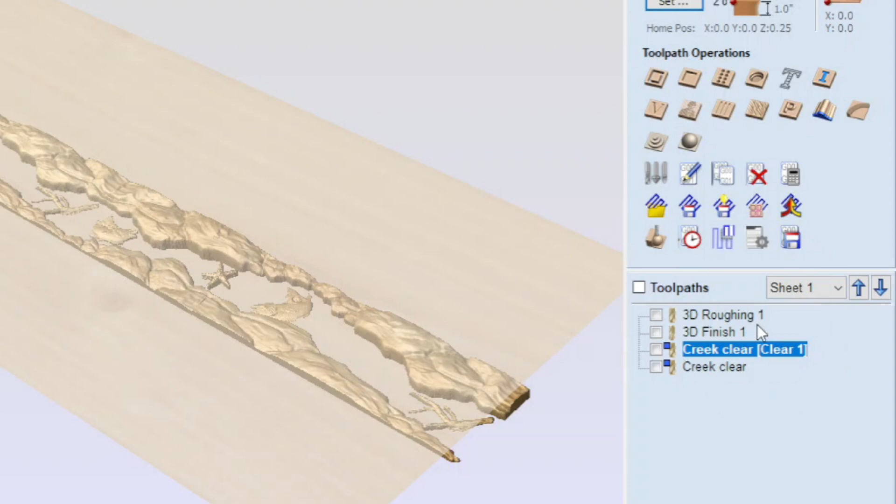Before I go into that, these two toolpaths up on top, we're going to check them—these are your 3D toolpaths. We're going to click into one of these, and we've clicked into the top one, and you can see this is the 1/4 inch end mill as well. So we want to make this optimal, running everything with the 1/4 inch first and then working down to our smaller bits.

So I'm going to close this, and what I'm going to do is select the creek clear 1, and use this little arrow right here to move it up. Matter of fact, I'll probably move it up to the top, so it'll clear out the creek first, and then it'll come in and clear out the 3D roughing, and then we have the finishing 1/8 ball nose.

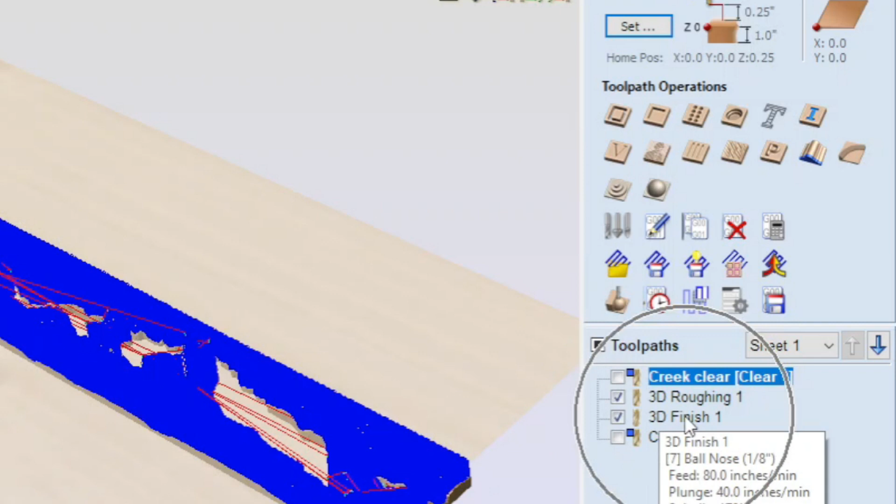I'm going to double click into that, and you can see right here it says ball nose 1/8, and then we have the 1/8 flat bottom bit right there.

So here you see I'm guessing—this is why when I normally name my toolpaths, I always put the bit in the name. For example, the creek clear, which is the 1/8 flat bottom bit, I'm going to right click that, rename it, and come to the end and type in 1/8EM, so I know it's the 1/8 flat bottom end mill.

So I'll just click that, and now we have the name here. The 3D finish, we'll rename that to 1/8 BN. Now I don't use slashes or hyphens or anything like that, because when it writes the G code for this, it's going to change those figures to underscores—it will not use periods or slashes.

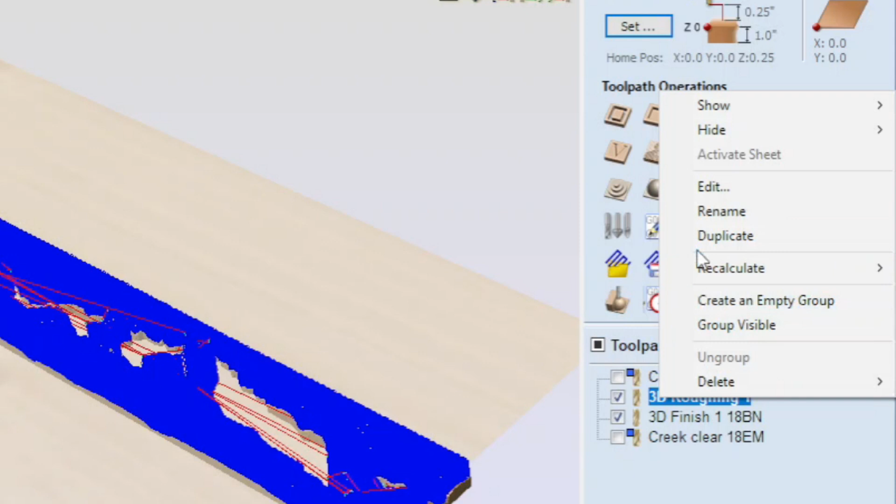These two are the 1/4 inch end mills, so I'm simply going to change the name of that. Rename at the end, I'm going to say 14EM. I would think a little bit more about these toolpaths and how they're named if I were doing them. So again, that's 1/4 EM. Now we've changed the names of these, and we know what bits we're working with.

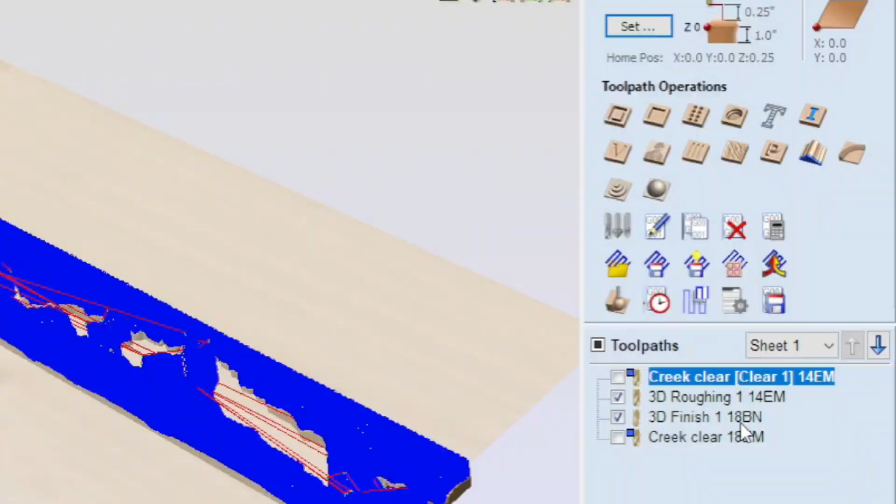So okay, it's the order of bits: the 1/4 inch flat bottom end mills go first, that'll take care of all your roughing. Then we're going to use the finishing 1/8 ball nose, because the majority of the bottom of the creek is taken out, and then it'll finish up with the 1/8 flat bottom. Now you might want to think about using the 1/8 ball nose as your second clearing bit on the creek if you wanted to. But I just want you to keep that in mind, because this will make it more efficient. It'll also save you bits, because you're getting pretty deep in this project, so you always want to think about that as well.